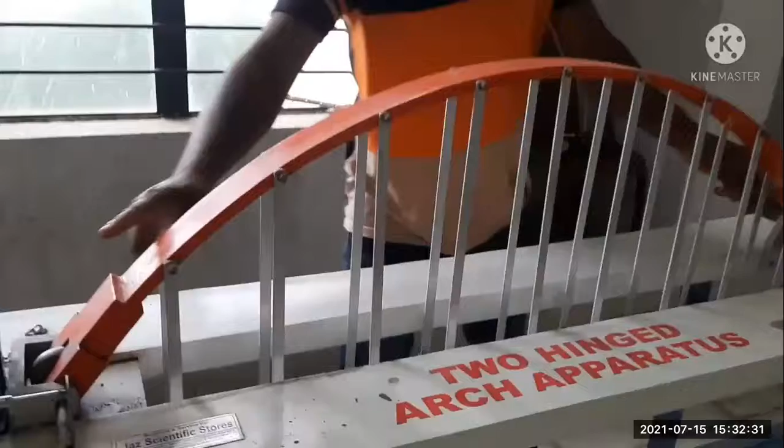And see the apparatus. Here this is two-hinged arch and both ends are supported by hinges, and you can see total span length is 100 centimeter, means 1 meter, and this portion from the center position, this side is called rise, and this side is 25 centimeter.

And you can see total 9 numbers of hangers are attached with the 2-hinged arch, and we will apply load in this arch, and in this experiment we will find experimentally and theoretically.

Experimentally we will find the value of horizontal thrust after applying load in this hanger, and we will also find the deflection when we will apply load.

Then the one end position of the arch will move forward, so it will give some deflection. So we have to check the deflection value.

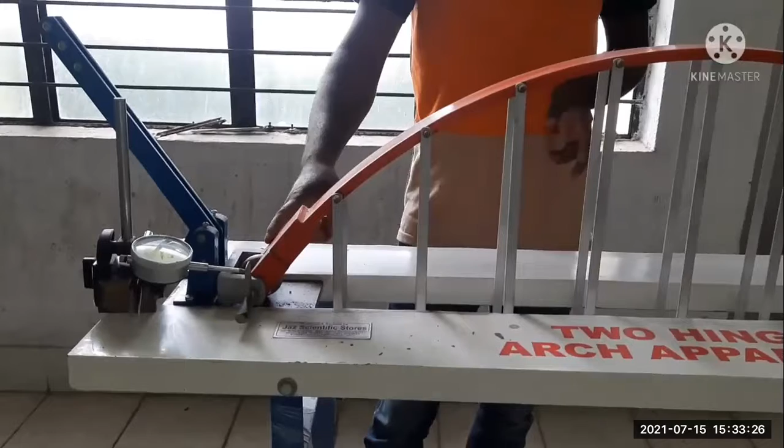So experimentally, basically two things we will calculate. First, the horizontal displacement experimentally with the help of this dial gauge, and second we will find the ILD.

ILD means influence line diagram. When we will move one load from this position to this position, from 1 to 9 position for rolling load, we will find out the influence line diagram experimentally and theoretically.

And so with the help of these two values, one is experimental and one is theoretical, we will compare those values, and we will find out the percentage of error.

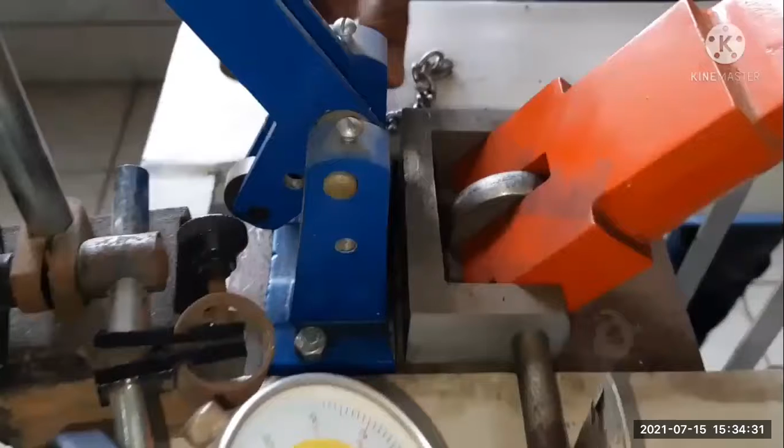When we will remove this lock, then it will touch the end position of this arch. When we will lock it again, then it cannot touch with this arch.

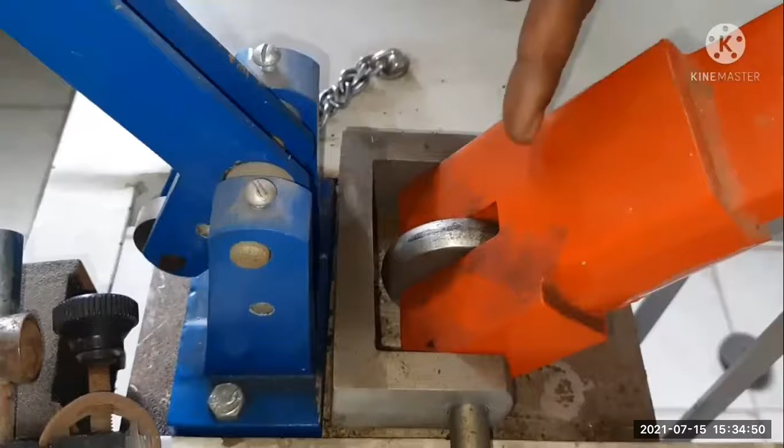One thing is here, you can see some extension part of this arch here. This is a steel sheet, which is attached to the end of this arch, from where we can measure the value of deflection.

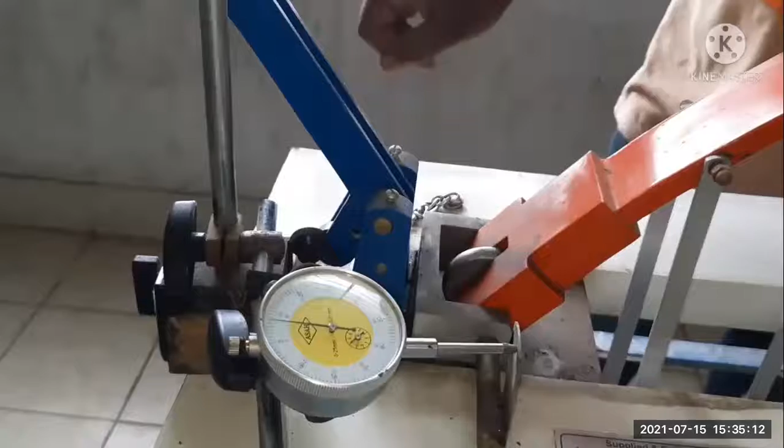You can see when we apply load here, then it will move forward, means this direction, and when it will move this direction, then it will give the displacement value, and we can find out the displacement from the dial gauge reading.

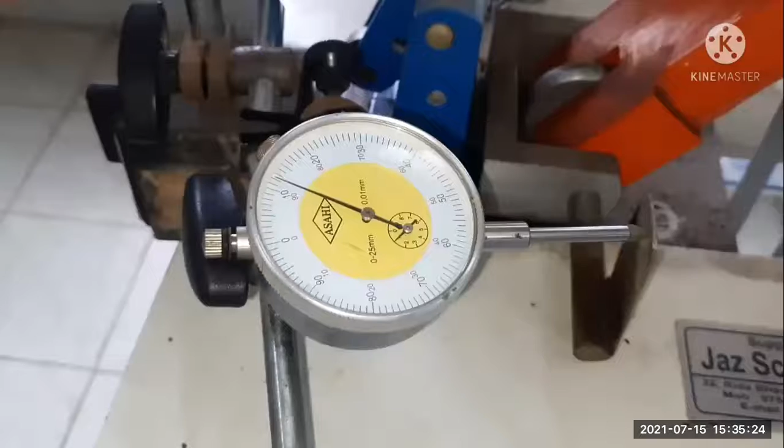So this is our attachment setup for conducting the experiment on two-hinged arch. Now we will conduct the experiment. See carefully.

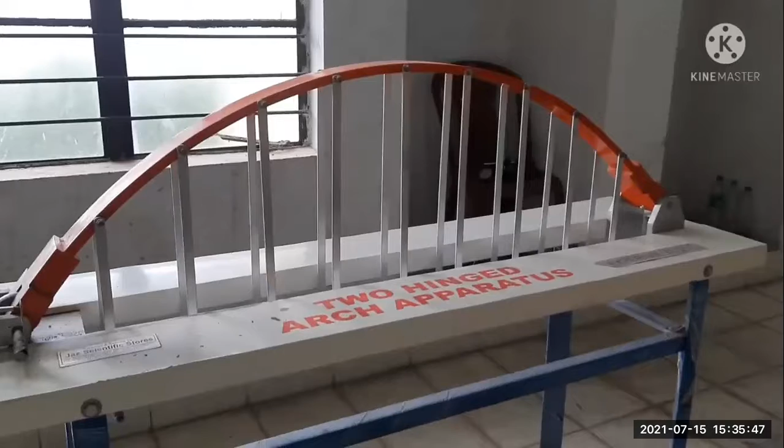Keep in mind, during this experiment the surrounding environment should be free from any kind of jerking, vibration or slacking. We are conducting our lab in a closed room, so jerking may be less, but to minimize slacking, jerking and vibration if anything presents, first we will apply 1 kg load in the central hanger.

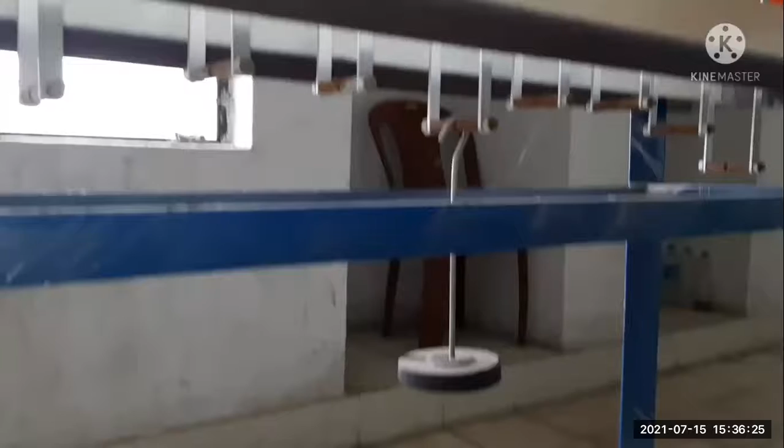You can see we are applying a 1 kg load. Why are we applying 1 kg load? So that the whole system, both sides of this arch, can stabilize itself.

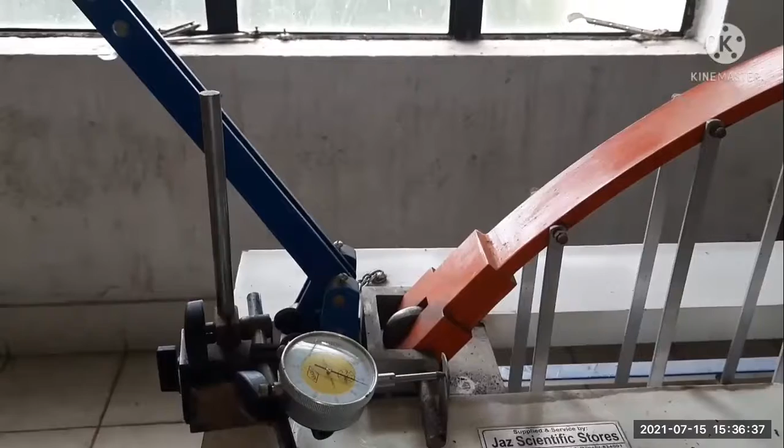Now we will apply load to the first hanger. When we apply load in the first hanger, it will move, and we will find out the displacement with the help of this dial gauge.

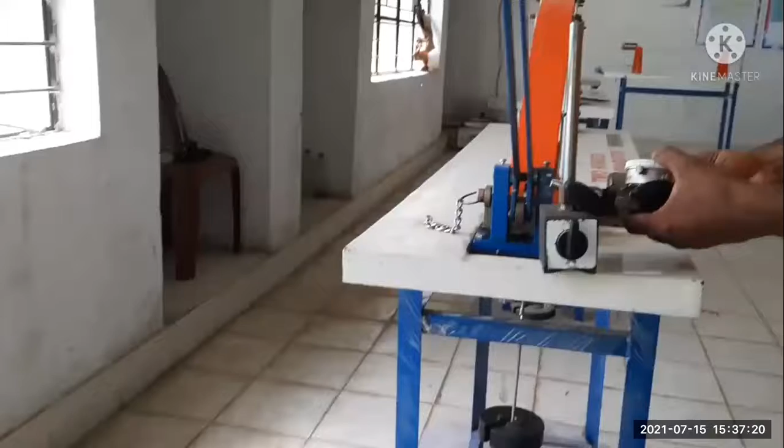To minimize the jerking or slackness, if anything presents here, we will similarly first apply 1 kg load at the first hanger, and then if any deflection is there, first set the dial gauge to 0, 0.

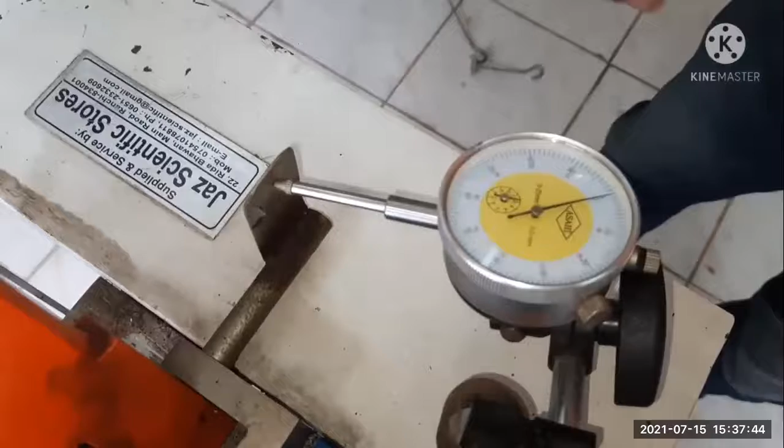After applying 1 kg load in the first hanger, first set the dial gauge reading to 0, 0. Here you can see the small dial gauge and the big needle are both in the 0, 0 position.

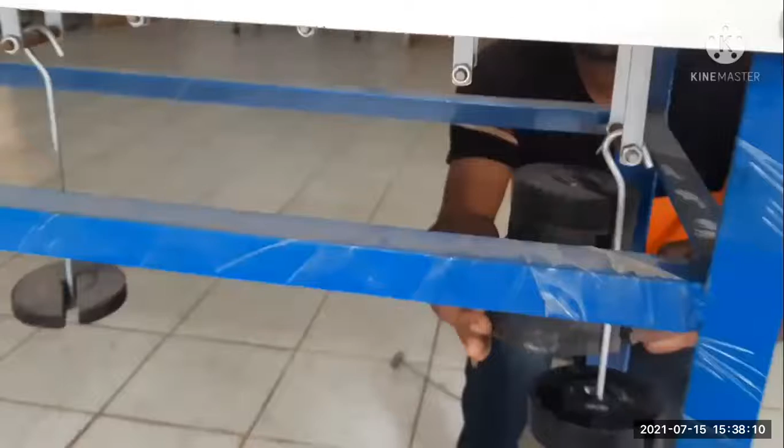Now we will apply 5 kg load in this first hanger and check the deflection reading. We are applying 5 kg load at once, and after applying the load we will check the displacement reading.

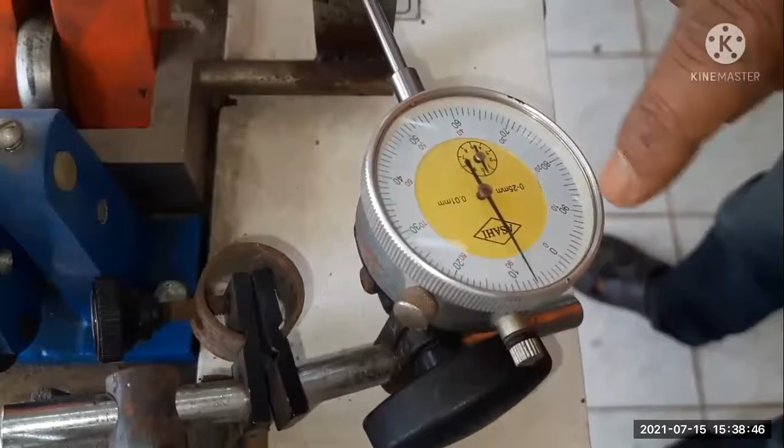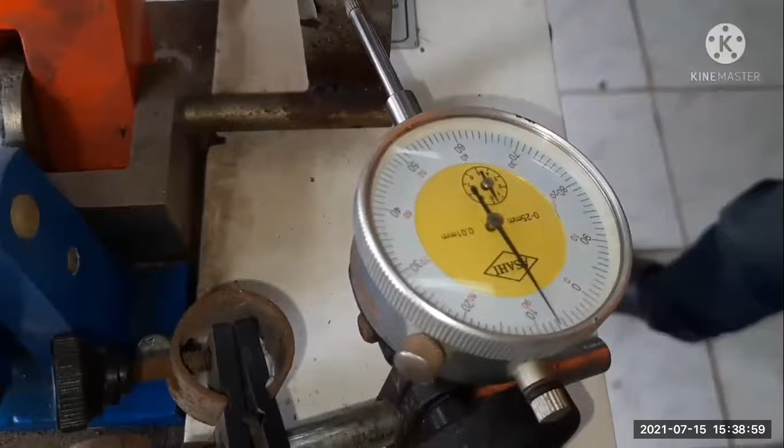See the readings. It was initially at the 0, 0 position. You can see now it has deflected from 0 to 1, 2, 3, 4, 5, 6, 7, meaning 0.07 millimeter. So our first deflection reading is 0.07 millimeter for the first hanger.

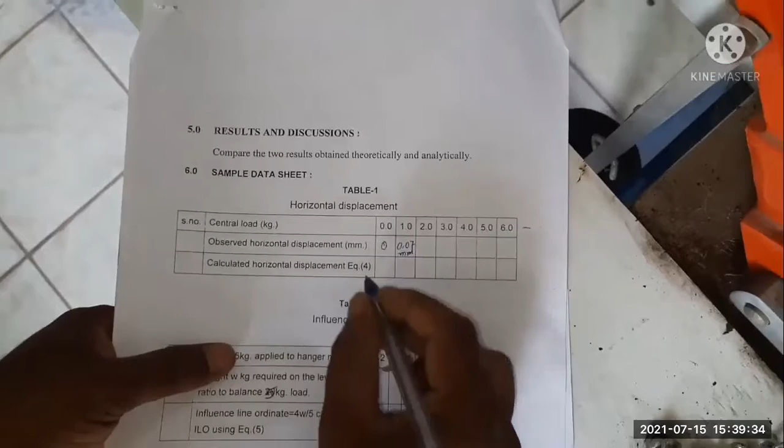Now see the table and fill it up. First observe the horizontal displacement for the first hanger, hanger numbers 0, 1, 2, 3, 4, 5, 6 up to 9. The observed horizontal displacement for the first hanger, number 0, is 0.07 millimeter, and we also have to find the theoretical horizontal displacement from the equation.

Theoretically, the horizontal displacement can be found from this equation: 5WL squared R divided by 48 E I.

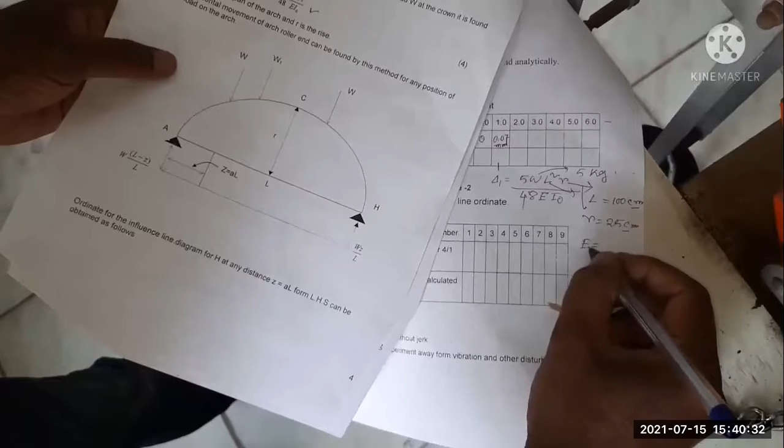Here W is your load, here we are applying 5 kg load. L is the length of the span. R is the rise, that is 25 centimeters, and L is the span length, that is 100 centimeters. E is the modulus of elasticity, which you know, and I is the moment of inertia, which you have to calculate as 1 by 12 B T cube.

Experimentally we found 0.07 millimeter as the displacement for the first hanger.

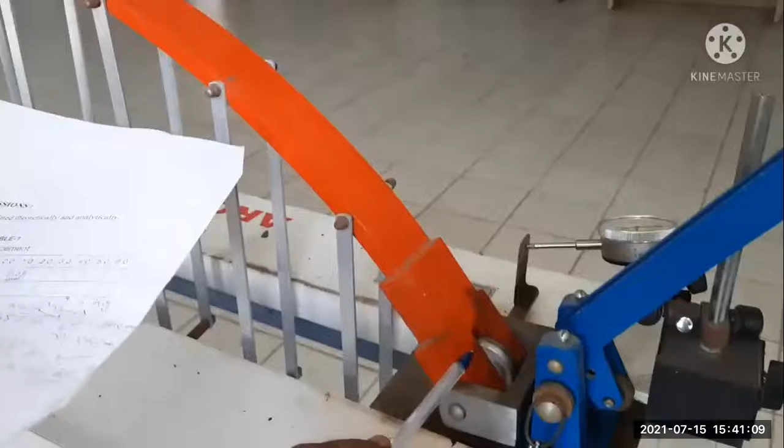Now see the other table, that is for the influence line ordinate. During the experiment, when we apply load here, the arch shows a displacement which we can find from the dial gauge reading. But this displacement and the horizontal thrust, after applying the load, we can resist by applying an opposite force. If we apply the opposite force in this direction, the deflection will be resisted.

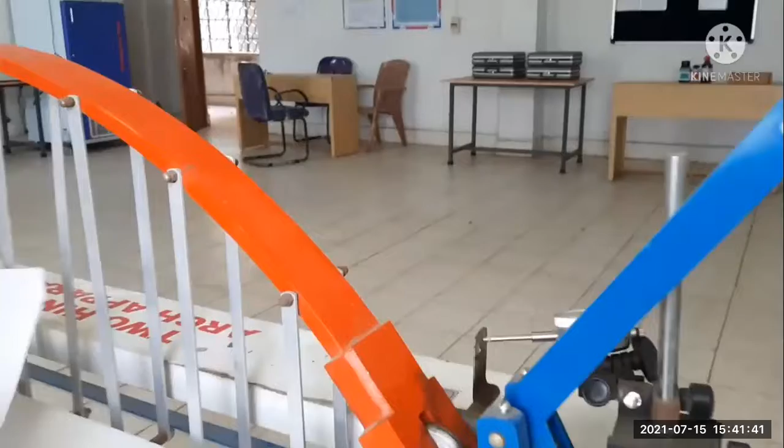How can we do this? With the help of this lever. You can see here, if we remove this pin, the lever will touch the end position of this arch.

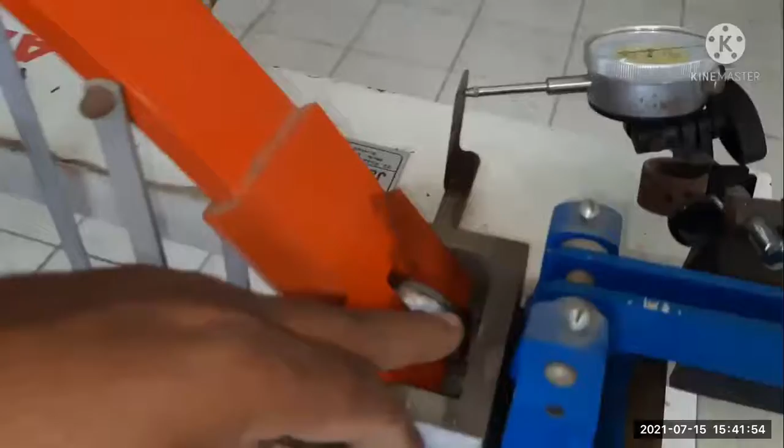This means if we apply load here, it will push the arch in the backward direction, turning it back to its original position.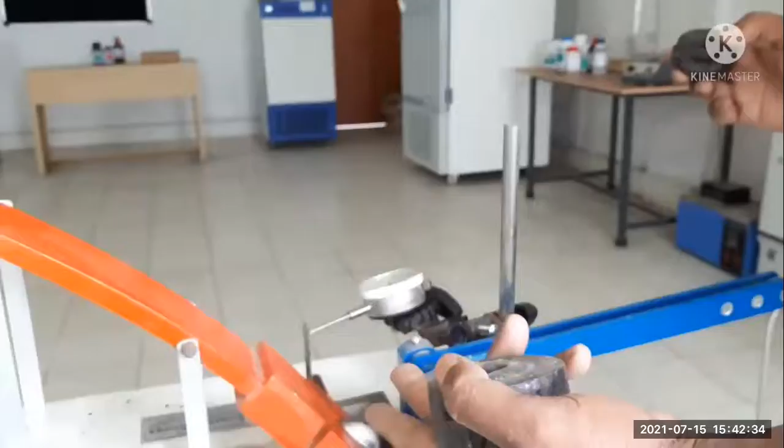So we have to check. Here you see the dial gauge reading shows a 0.07 millimeter displacement. So we have to apply a certain quantity of load so that the arch can return to its original position, meaning the needle should regain the 0, 0 position.

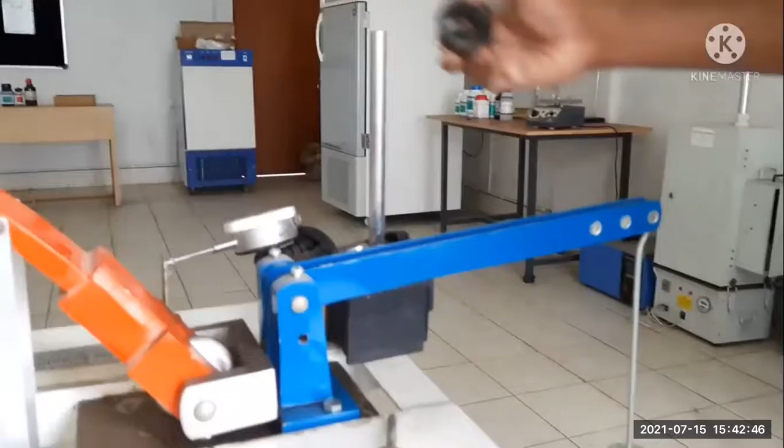So we are applying load and observing the dial gauge reading. To resist the horizontal thrust generated by the two-hinged arch, we are applying an opposite force here.

First we are applying a 200 gram load. You can see the deflection is much more than 0, but that is not correct. Actually we have to fix this needle to the 0 position, so we have to apply less weight.

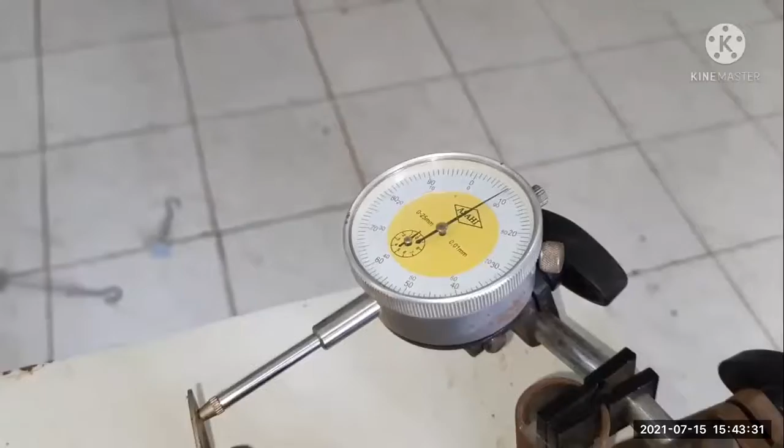We are applying 100 grams. See, a little back deflection. Now applying 50 grams.

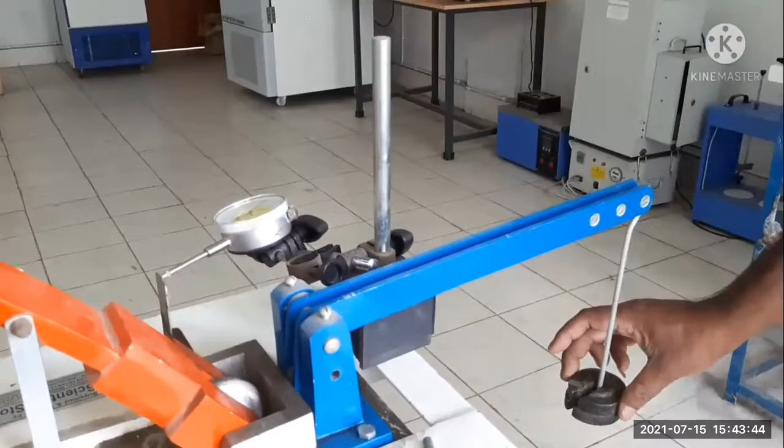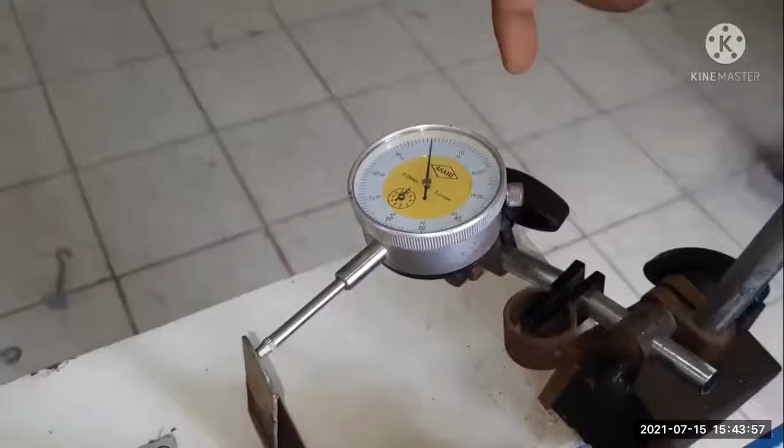See the reading. After applying 50 gram load, we can see the needle position is now 0 0. So we can say this 50 gram load can resist the horizontal thrust generated by the two-hinged arch when we apply load.

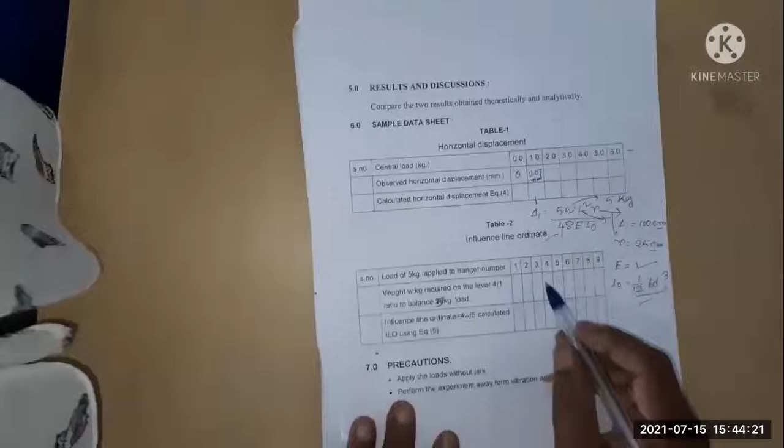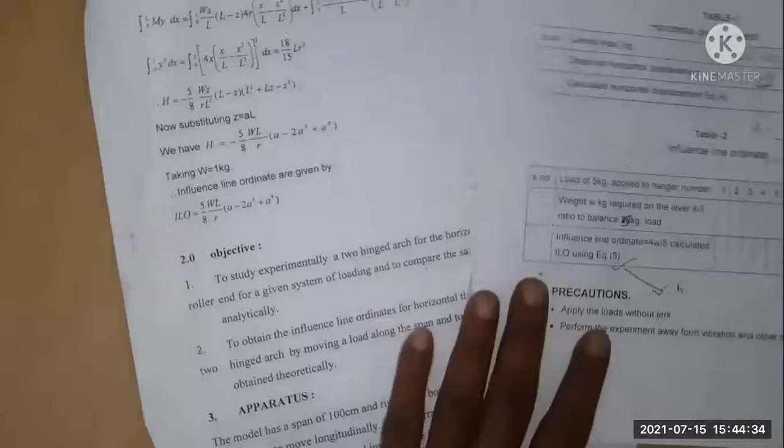Now see the table for influence line ordinate. To draw influence line ordinate, first we have to calculate the value using equation 5. Here is equation 5, ILO theoretical equals 5 by 8 WL, where W means weight.

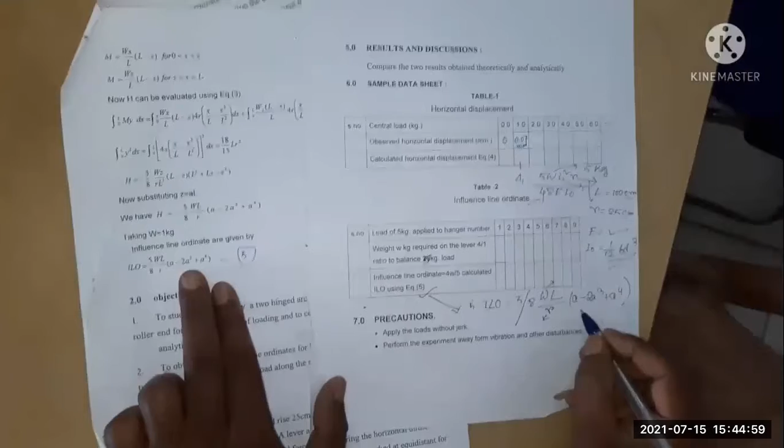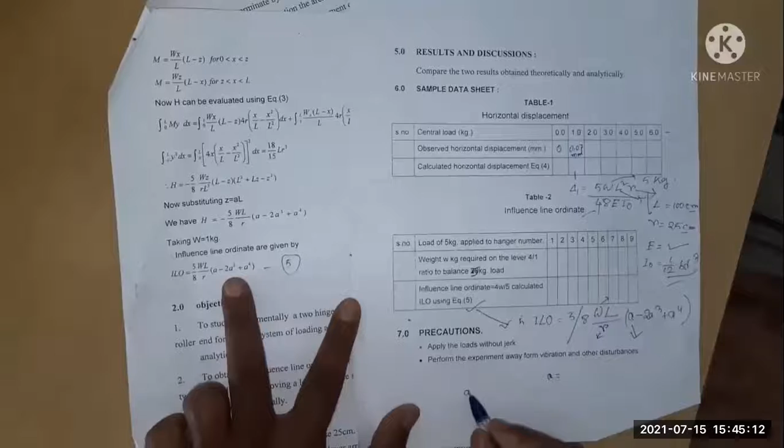Load 5 kg, L span 100 centimeter, R riser 25 centimeter, A minus 2A cube plus A4, and A is distance of the hangers from its end support. For first hanger, with total 9 hangers meaning 10 divisions, 100 by 10, A will be 10 centimeter.

From this equation we can find the value of ILO, and experimentally we can also find the value using equation 4W by 5. The weight W kg required on the lever is in ratio 4 by 1 to the 5 kg load. So our W here experimentally is 200 gram.

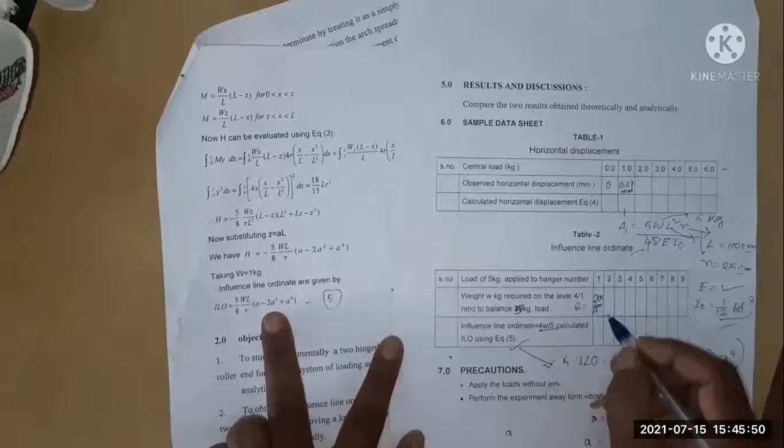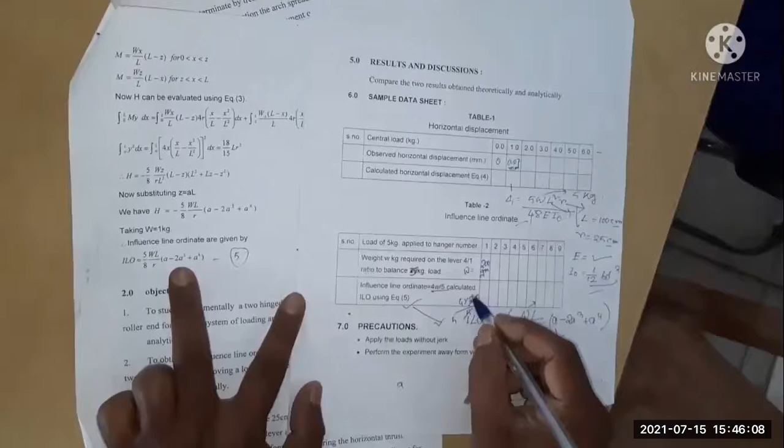In this row you put the value of W, and in this row the value of influence line ordinate ILO for 4W by 5. So 4 into W means 200, divided by 5, we are getting 160 by using this equation 4W by 5, where W is 200 gram.

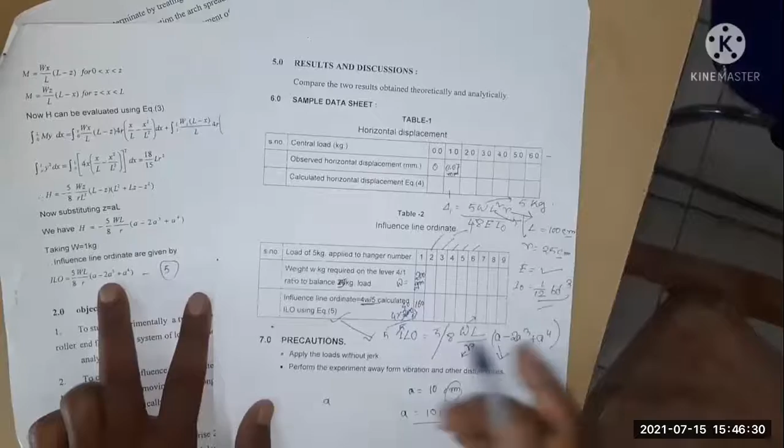So similarly we'll do the same for hanger number 2, hanger number 3, hanger number 4, 5, 6. Actually we'll move the load from hanger number 1 to hanger number 9 and repeat the process.

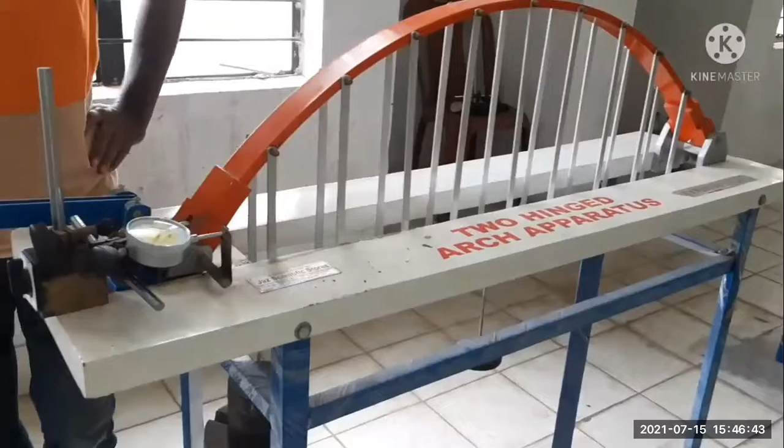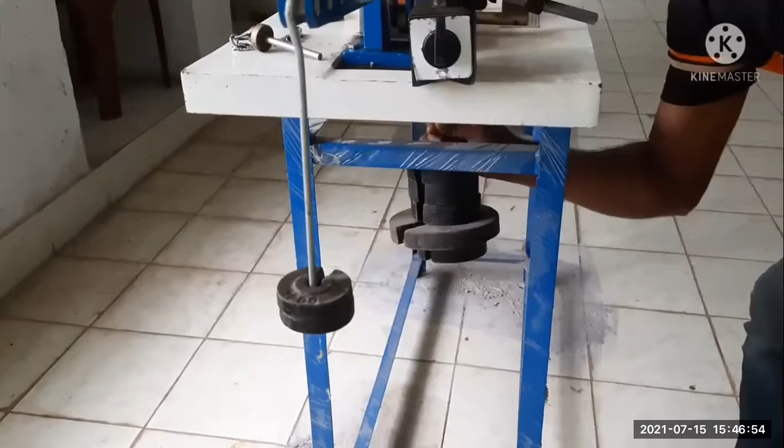Now we'll remove this load. You can also note down the value during unloading. While unloading this load from the first hanger, note down the unloading reading. Here we are removing the lever load, and again setting it to 0 0.

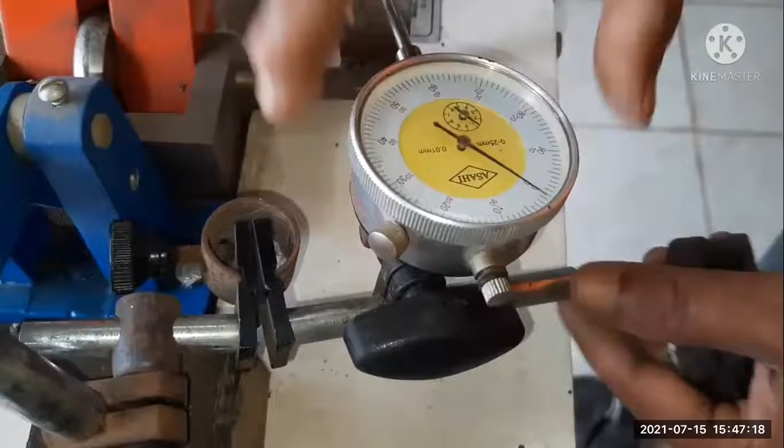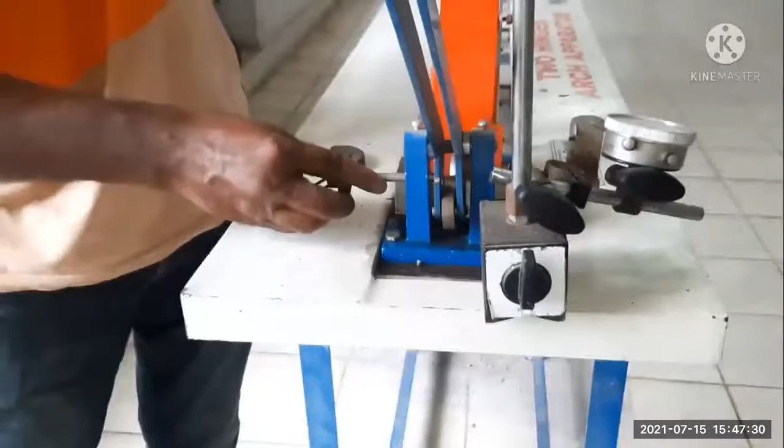Before conducting the experiment for the second hanger, first lock this screw so that it cannot touch the end position of the arch, and do the same for the second hanger. First apply 1 kg load. For the second hanger I am applying 1 kg load.

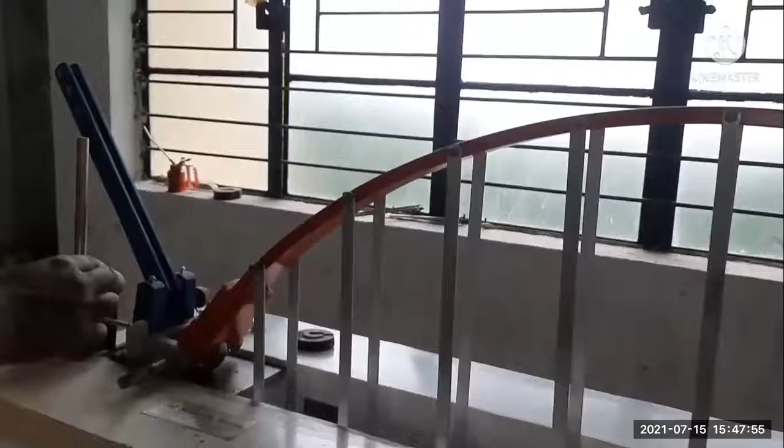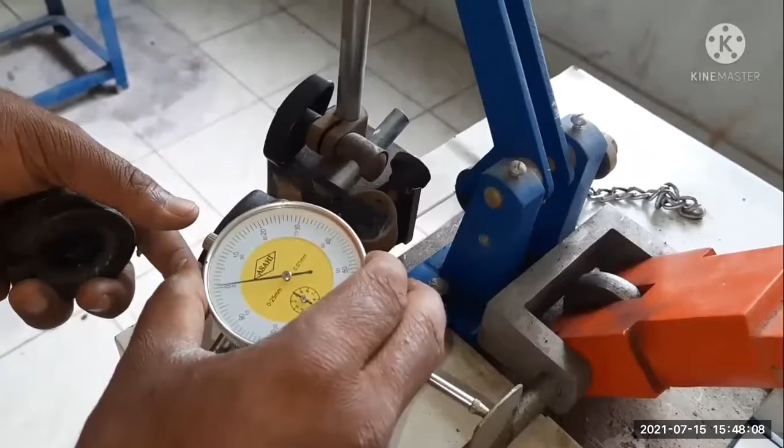If any deflection is here, first set it to 0 0. You can see some deflection here. Set the needle to 0 0. Now we will apply 5 kg load.

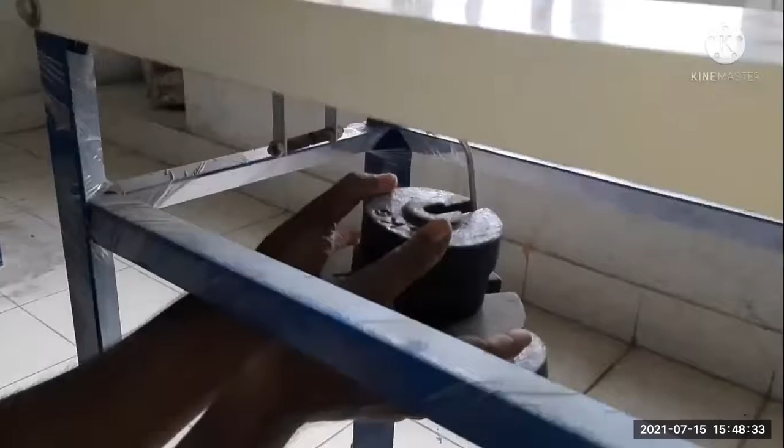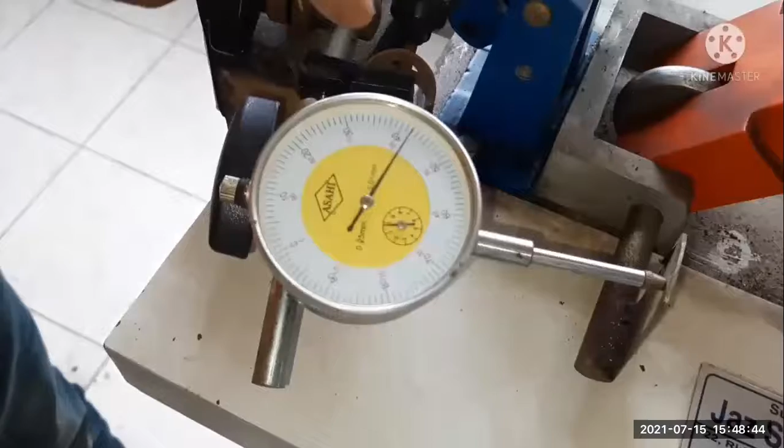For the second hanger we are applying 5 kg load. See the deflection, 0 to 0.42 millimeter. See the deflection value, 0.42 millimeter.

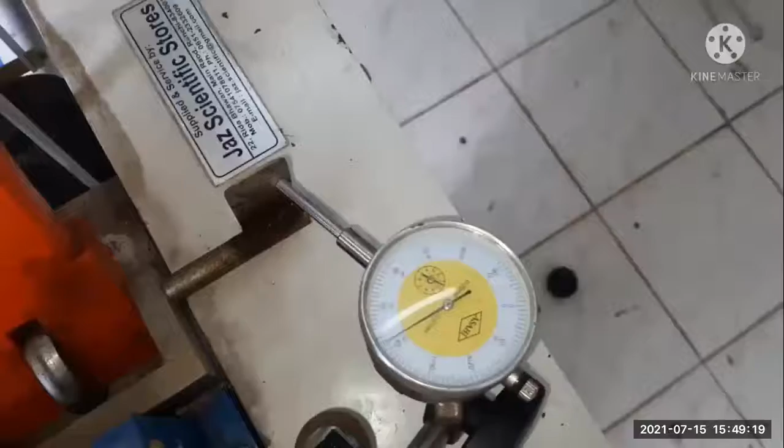Same as previous, first remove the lock and gently touch the surface of the arch. You can see it is still showing 0.42 millimeter on the dial reading. Now we'll apply the opposite force.

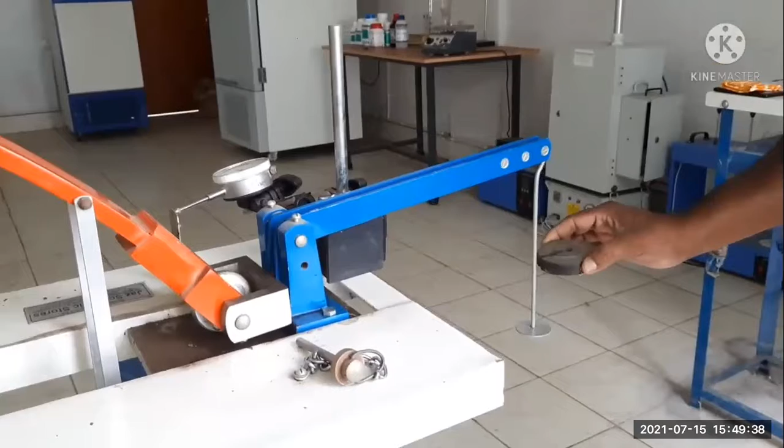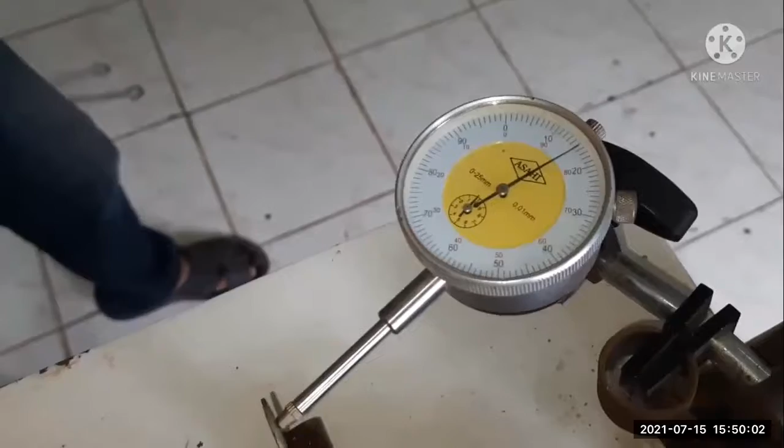We have first applied 200 gram load. Simultaneously check the needle. Apply 200 gram load. Here again, from 0.42 it now comes to 0.15 millimeter, so we have to apply more load.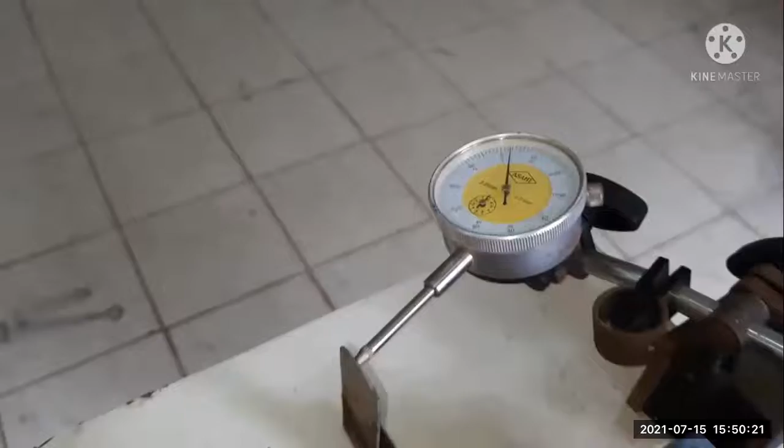I am applying 100 gram now. See, now it's almost at the 0 0 position. If we had smaller weights like 20 gram or 30 gram, it would be more accurate, but due to lack of those weights, we have to adjust.

So we can say this is 250 gram opposite force for this case, for the second hanger. We'll place the value, observe horizontal displacement for the second hanger which is 0.42 millimeter, and calculate the horizontal displacement using this equation, then place the value here.

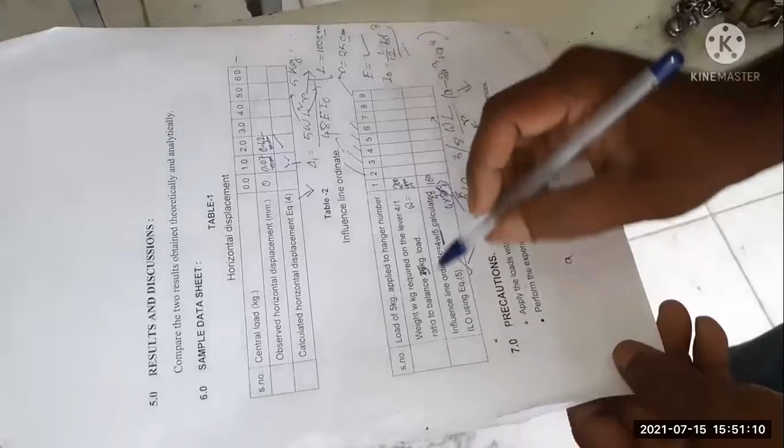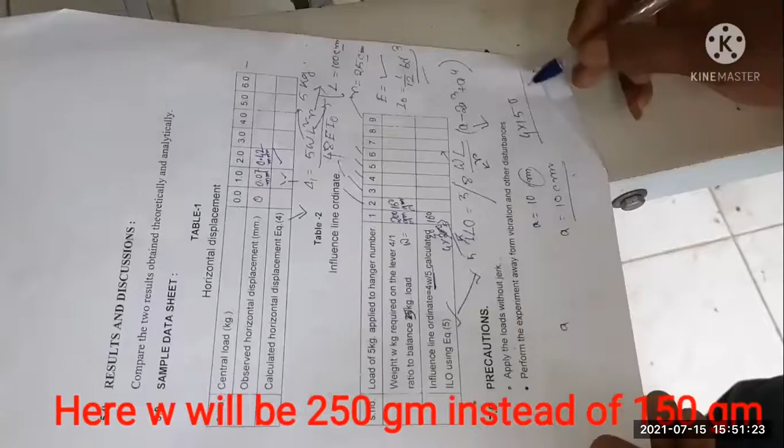For influence line ordinate, same for second hanger, the W is 250 gram, so 4W by 5 will be 4 into 250 divided by 5, that will be 200.

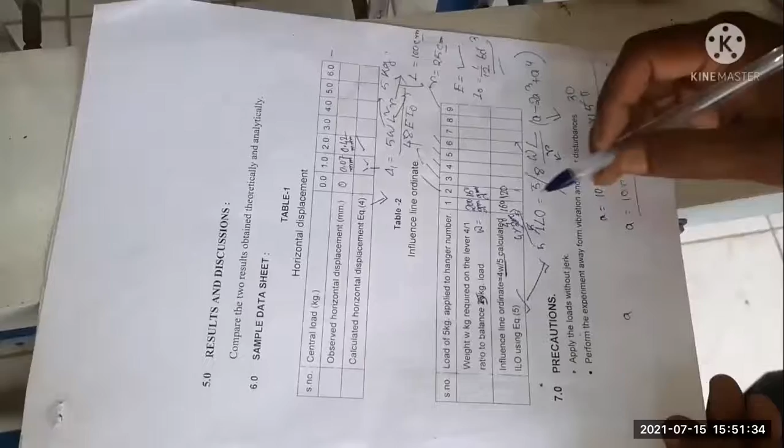So experimentally we found these values, and you have to calculate the values theoretically from equation 3 by 8 W. You know all the parameters W, L, R, A. In this case A will be 10 plus 10, since the distance of the second hanger from the end condition, with each hanger to hanger distance being 10 centimeters, so A will be 20 centimeter.

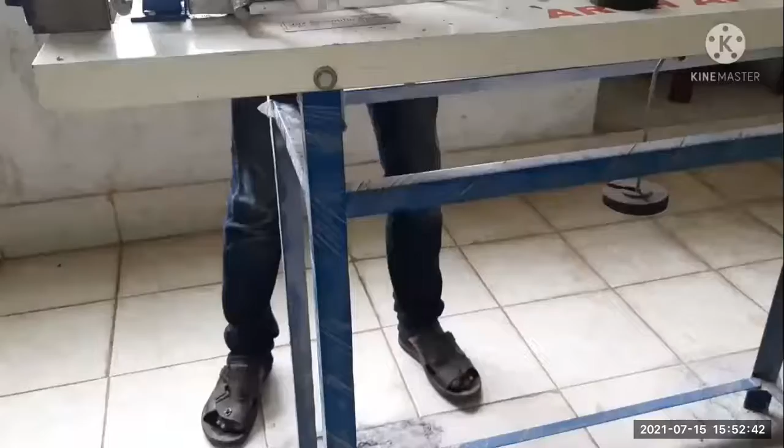We'll do the same experiment for the third hanger, fourth hanger, and so on through 5, 6, 7, 8, 9th hanger, placing the values in this table each time. Now we'll do the experiment for the third hanger. First remove the load and lock the pin.

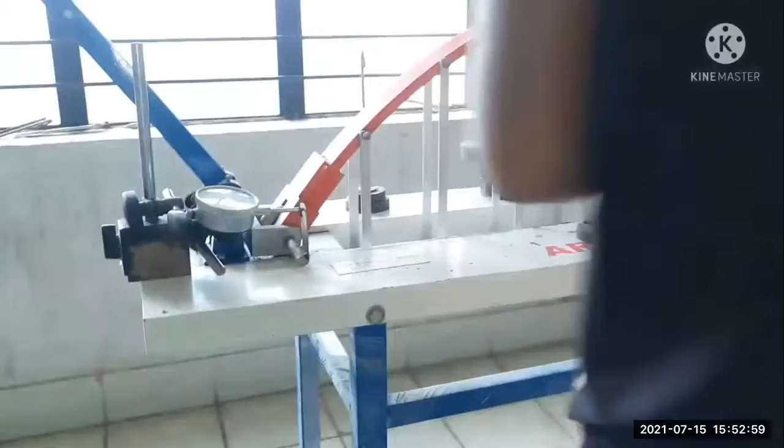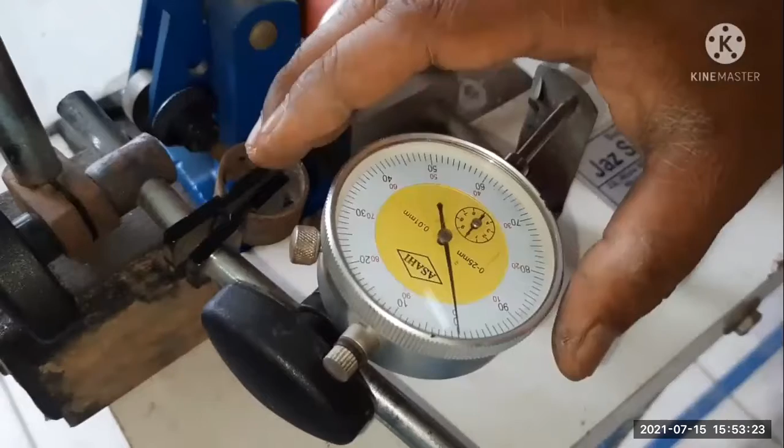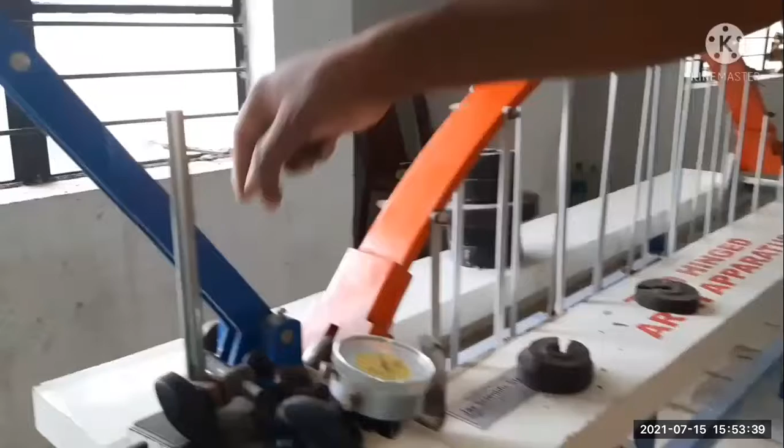And similarly for the third hanger, we will apply 1 kg load first and set the dial reading to 0,0 position. After that we will apply 5 kg load on hanger number 3, and again measure the dial gauge reading, meaning the deflection value. Then we will remove these pins and apply the opposite load.

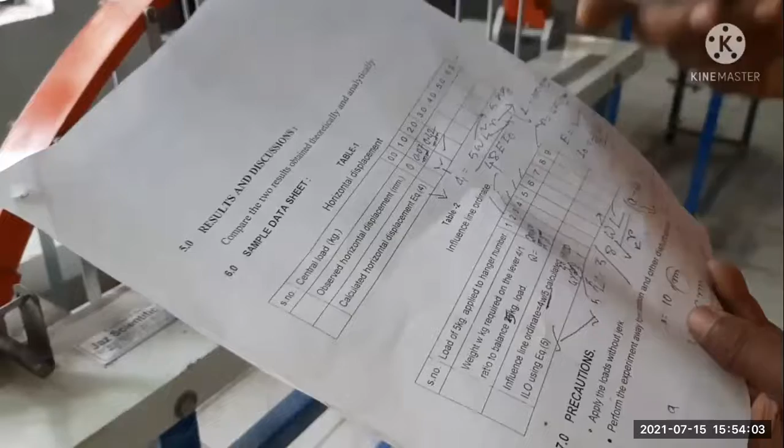We will find out the value of ILO, meaning influence line ordinate. Similarly for the 4th, 5th, 6th, 7th, 8th and 9th hangers, for each case you have to fill up these tables: one is horizontal displacement, and second is influence line ordinate due to the horizontal thrust. With the help of these values, you also have to draw the influence line ordinate diagram. I think it is enough to understand the experiment.